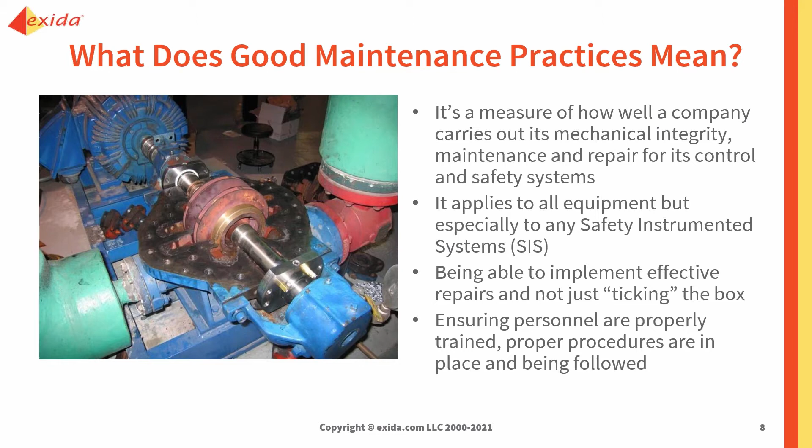And the third P is the paperwork. Do we have the paper trail to show that we're doing what we said we were going to do? Because if we don't, we could end up with problems occurring there. So this is the reason why we need to do this. The next question is, how do you know how good your practices are? And here again, when I talk to companies, a lot of the managers feel that they are following good practices, but they're not necessarily measuring it.

So one of the things that you can use that we have come up with at exida is something called the Site Safety Index model. It's a way of doing a qualitative first pass, if you like, at assessing the capability. It's basically a questionnaire. So you can go to the Site Safety Index website and fill in the questionnaire. If you fill it in honestly, it'll give you a ranking.

The other way to do that is to follow up with an independent third-party site audit, where somebody comes in and does a series of interviews to see how things are being done. Being able to measure the SSI is obviously very important in terms of understanding where the company currently is and what improvements can be made.

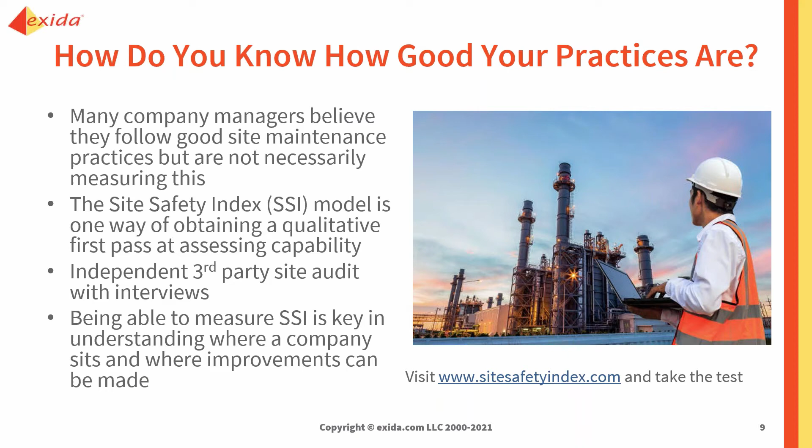So what is this model? It is basically a simple qualitative model using concepts from 61508. So somebody said to me this morning, well, where is it in 61508? Well, it's not. It's what we have determined from the concepts of 61508, and we have built this into our tools so that you can look at how well maintenance is conducted. And you can look at it from the sensor subsystem, the logic solver subsystem, or the final element subsystem.

And as you can see, there are 5 levels, 0 to 4. 4 is perfect. That means everything's done on time according to requirements and nothing is missed. 0 is bare minimum. That repairs are not always done when they need to be done, or they're not fully complete. There's some sort of band-aid that's been done to just get them by. These are things that would cause a degradation into the performance of the SIFs, your safety instrumented functions.

So you may think that you've got a SIL2 SIF, but if you're not maintaining it properly and you're not doing the proof testing according to requirements, so here again, it's important that the safety requirement specification is with the operations and maintenance people. If you don't know what's in that SRS, how are you going to be able to maintain the safety instrumented system and its safety instrumented functions properly?

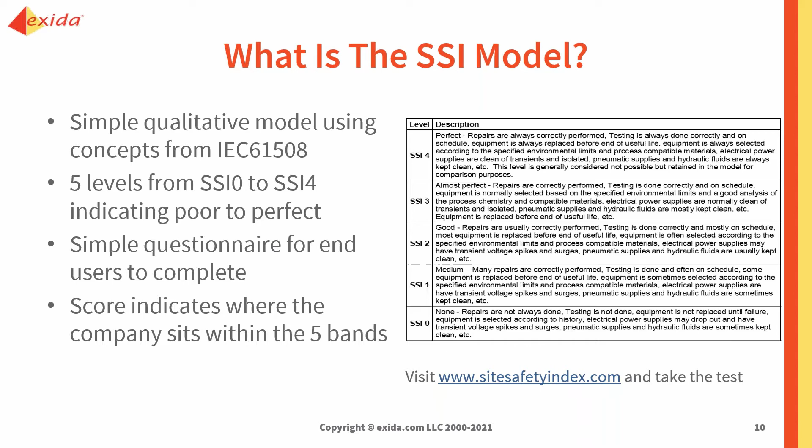So again, with the tool that we have, we usually give the benefit of the doubt and default to an SSI2, which means good. And if you do have exSILentia, you can try it yourself. You can, for example, look at the final elements and change it from good to 0 and see what it does to the risk reduction offered by the SIF. And you'll be very surprised. It has a significant impact.

Well, culture is very endemic in a company, and it usually comes from the top down. So if the company board is only focused on the bottom line and keeping their shareholders happy and minimizing costs, that's not going to help when we're trying to maintain the SIS and its SIFs.

So if you went to your manager and said, look, I need to raise a purchase order to have these devices replaced because they're coming to the end of their useful life, or I need to spend X thousand dollars to have these valves refurbished. And he says, well, have they failed? And of course, the answer is no. The pushback may be, well, then why do we need to do that? So this is another area where we are trying to help educate end users by explaining to management, if they don't understand, why these things are important.

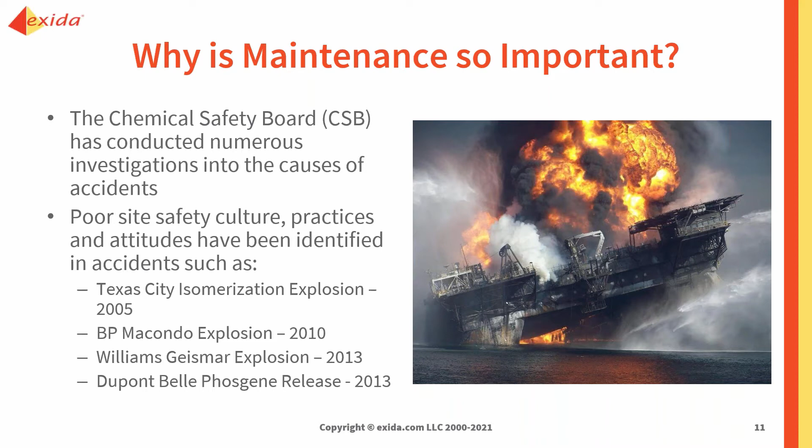And interestingly, and I should have made this point this morning, is that insurance companies are paying attention to all this now. And they're having their assessors come on our webinars. In fact, I've done a series of webinars for a couple of the insurance companies for them to understand the questions they need to ask their clients when it comes to functional safety and cybersecurity, and indeed alarm management. So it's very important to have the right culture.

Some of the factors that can impact the safety instrumented system and the overall performance, of course, is the equipment selection and qualification. So when the design is being done, it's very important to look at the requirements for the equipment. And whatever equipment is chosen, 61511 is very clear about how you justify the choice of the equipment you're using in your safety instrumented function design. The first is to use IEC 61508 certified devices for the relevant SIL level. The second is prior use justification. That is it. Because I like the equipment, because I'm used to the equipment, doesn't qualify.

Prior use justification requires that you have a considerable amount of accurate data, failure data, on the devices you're using in similar operating profiles and environments. Now, it doesn't necessarily have to be in a safety application, because function-wise, they're operating the same way, whether it's safety or non-safety. So if you've been using it in normal non-safety, as long as the data is sufficiently voluminous, so in other words, we have a high number of operating hours of data, so from a statistical point of view, it's valid, and it's applicable to the environment and the conditions, then we can use that data. If not, it's going to be very difficult to justify the prior use application.

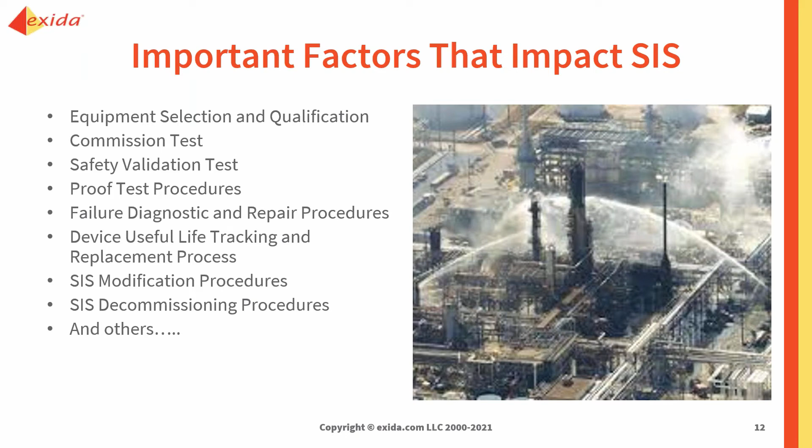SIS decommissioning as well, those procedures, because if we're going to take the SIS offline, how are we going to do that? Are we going to do it with the facility running? In which case, are we going to take a SIF offline at a time? And how are we going to manage that? So all of those things are very important. And of course, there are other things as well that will impact the performance of the SIS and its SIFs.

So what are the consequences of improper maintenance? Well, the obvious one is that we could end up with SIFs failing on demand. This is something we want to avoid like the plague, because hopefully the SIFs never get called into action because our non-SIS layers of protection are doing their job. But if it is called into action, it needs to be reliable and work.

We can also get an increase in unwanted trips. Here again, if we're not maintaining our equipment properly, we could get a lot more failures, premature failures. This will have an impact on maintenance because it's now going to increase the maintenance budget because we have to spend more money and more time fixing things or having to start up again.

And of course, if we've had a trip, depending on what it is, if you've got a refinery and you trip the refinery, that's significant, because when you start up again, that's one of the highest risk activities you can do. Plus, it may take you the whole day to get the whole thing back up and running. So the cost of that can be significant. If it's 60,000 barrels a day, you lose a day's production.

The increase in risk and the likelihood of a major accident will go up every minute of every hour of every day of every week of every month of every year. So if we're not doing proper maintenance, we're going to increase our risk. We're also going to increase the potential for serious injury or fatality as a result.

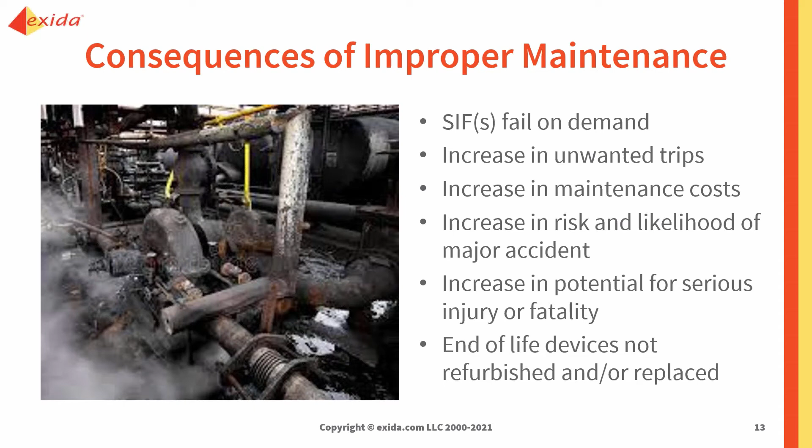Now let's remember that the whole purpose of IEC 61511, the standard, is to provide us with a means to reduce our risk. But more importantly, it's a performance-based standard. It's not prescriptive. So for example, the NFPA 85 is prescriptive. Double block and bleed, you've got no choice. Whereas with a performance-based standard, it'll say this is what you need to do, but how you do it's up to you.

Also, because it's a performance-based standard, we need to have a means of being able to measure how we're doing. So we obviously have to come up with some performance indicators to be able to measure, to know how we're doing. And it's interesting that when we look at the life cycle, there's this one box that says operation and maintenance. And by the way, operation and maintenance is all covered under clause 16 in the standard. And this one box here is where we're going to spend 90% or 95% of our SIS lifetime.

So we can do all the analysis correctly. We can design our SIS and all its SIFs correctly. We can have all the right SILs. Everything's hunky-dory. We're within our target. But if we're not following the operation and maintenance properly, we'll very soon degrade and not have the level of risk reduction and protection that we originally designed. So it's very important for us to track how we're doing.

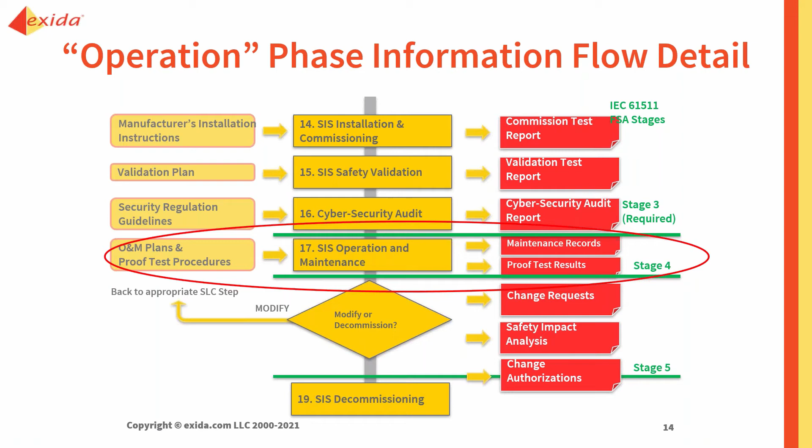And therefore, we need to come up with a set of KPIs, key performance indicators, so we can use it to measure the effectiveness of the SIS and its SIFs in terms of doing its job of risk reduction. One way of doing it is you can use some leading and lagging indicators. And I did another webinar on this as well, which is in the archives if you're interested.

But fundamentally, leading indicators are indicators that will give us an idea as to whether or not we're likely to have a problem in the future, such as we're not doing regular assessments of our O&M people. We're not making sure they're maintaining their level of knowledge and skill. People leave, we bring in new people, we don't train them properly, but we expect them to be able to perform. Unreasonable. So if we're not doing that, that's an indication that we're likely to have a problem later on. Procedures not being followed, that's another one.

Proof testing. If we're not doing the proof testing according to the requirements of the SRS, this can also be a major problem, especially if we get outside of 10%. Because if the proof test intervals have been set at 18 months and we miss them by a couple of weeks, okay, that's not a huge deal, but we would want to see if we could improve that. Conversely, if we miss it by 2 or 3 months, now this is a big deal because it's going to have a big impact on the safety integrity of the SIF and how much risk reduction it's providing. So those are leading indicators, and that will tell us that if we continue doing that, we're going to have a problem.

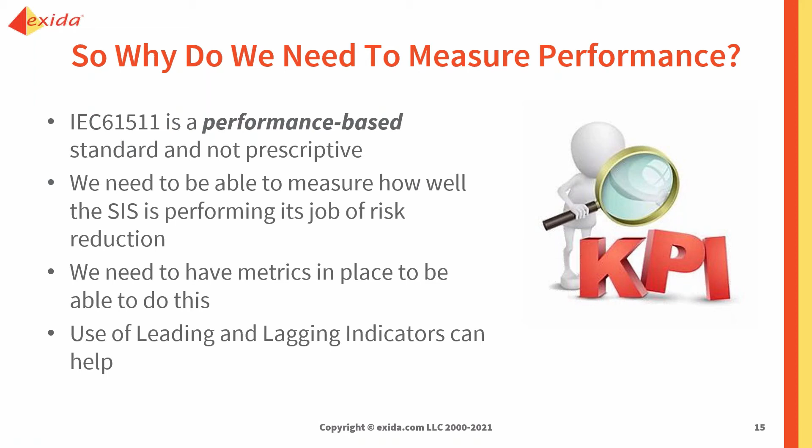I mentioned culture already, but this cannot be overstated. We really need to have the right culture. If the culture's not there, it's going to be very difficult for the people who are responsible for maintaining the safety instrumented system to be able to do it without continually battling with management for funding. Management has to buy in and support this process. So this means we need to develop a learning culture, an open and learning culture. So that means that we have to be willing to do things right and also doing the right things.

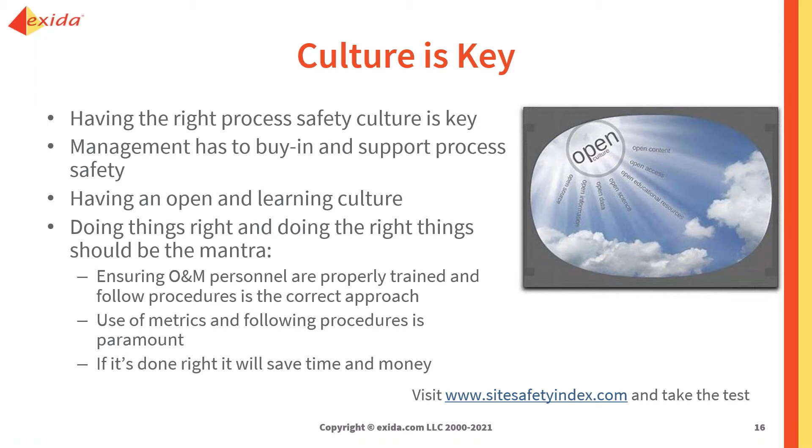We learn from mistakes, we don't punish, we encourage, we want people to take responsibility, we want them to have some ownership. So making sure people are properly trained, making sure that procedures are being followed, conducting audits. And I say to managers, you can do your bit simply by walking around, talking to people, seeing what's going on, and reading any of the audit reports that are being done. Because if you see that there's a trend going in the wrong direction, then that needs to be corrected as soon as possible. And of course, if we do this right, it actually saves us time and money. Because if we're not having to restart because we've had a trip due to a failed piece of equipment or somebody making a mistake, that will save us time and money.

Now, the other thing is 61511 was changed in 2016, as most of you know, and one of the requirements now is to do the FSA4. And it's interesting that some countries, and Australia is one of them, do insist on FSA4s being done. So the regulatory control is much stronger. And also in Europe, in some countries in Europe and elsewhere. But over here in the US, this doesn't seem to be done very much. And it's a shame because the standard says you need to do it.

It doesn't tell you how often you need to do it. That's something that you can define yourself, and you can do it based upon experience. If you're getting incidents and trips and near misses, then that should be an indication that you need to dig in and start looking at what's going on. If the performance is good and we're not having any issues and problems, you could probably do it every 2 or 3 years.

But the way to look at it is every 5 years we have to revalidate the PHA, and do the hazard and risk assessment again. And that's a good period of time to be gathering information. So the information you gather from the FSA4, you can feed into the HAZOP team.

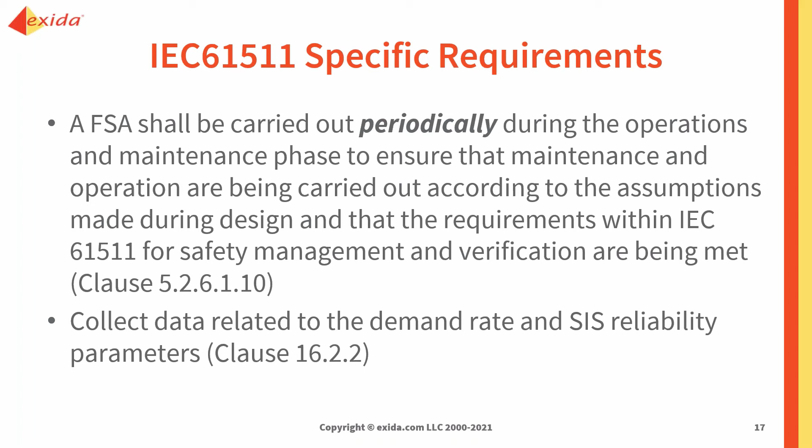So you can look at the assumed demand rates. Were they the same? Are they still the same? Or do we need to reconsider? So what needs to be measured? Well, we define the proof test intervals, as I've said, and those are used in the SIL verification calculation to prove that the SIF design meets the target SIL and the risk reduction.

So how frequently does it need to be done? We need the SRS. We need to follow that. Is it being performed on time? As I said, as long as you're not going over 10%, even then, up to 10% is still going to have an impact. But if it's more than 10%, it's going to get worse very quickly.

Then are the proof tests as effective as originally intended? So here again, are we following the proof test procedures? Because you can design the best proof test in the world, and let's say you can get 95% coverage, but if it's going to take 10 hours to do the proof test, well, guess what? It's not going to get done the way it was intended. So the effectiveness is not going to be there. And again, that has an impact on the performance of the SIF.

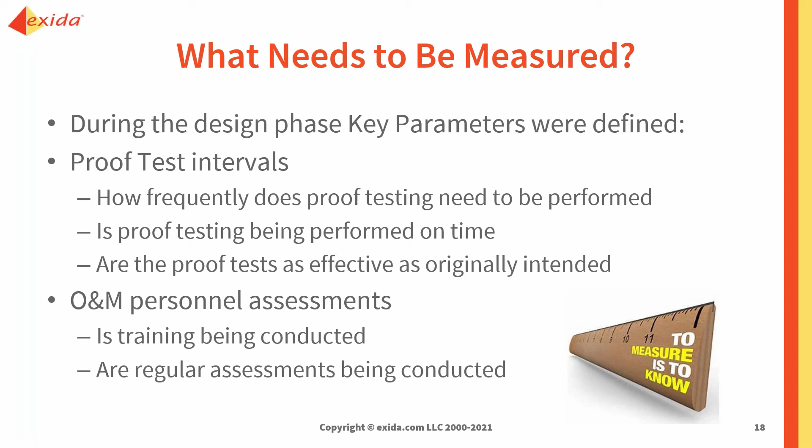The O&M personnel assessments. So are we conducting the training? How often are we doing it? The standard says it needs to be done periodically. Again, it doesn't tell you what that period of time is, but it needs to be defined.

So we've talked about demands on the SIS, whether they're real or false. So we should be counting those, and we should be making sure that they're within the required limits. If not, we need to do some investigation. Incidents and near misses, as I've said already. Failures, both random and systematic.

So if we've got some systematic failures because, let's say, an instrument tech miscalibrated a trip point on a piece of safety equipment such that it would be in a dangerous situation because it would never reach the trip point. So that would be a systematic, because either he's not been trained properly or the procedure may be wrong. That could be a systematic, but it needs to be looked at.

Random failures are failures that typically relate to hardware, but could be people, because people can make random mistakes as well. And that's why it's important to make sure that you understand the type of failure, because when we do the revalidation for the SIFs using field data, it's all based upon random failures. So if we haven't been documenting our failures correctly, we could have optimistically low random failure rates that we're trying to use. Proof testing, as I've mentioned already.

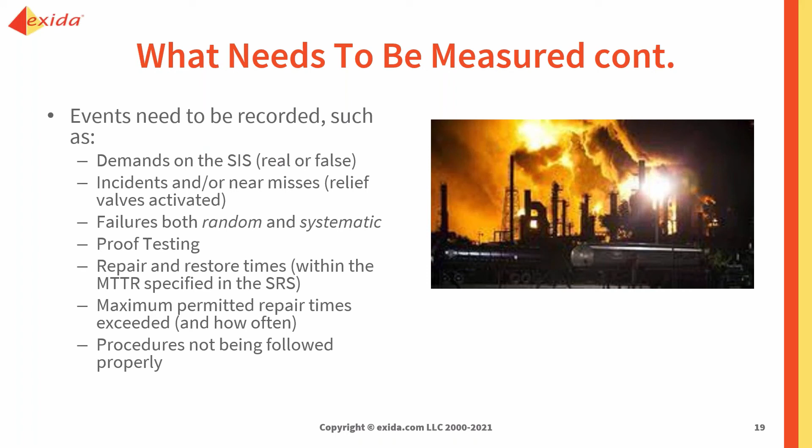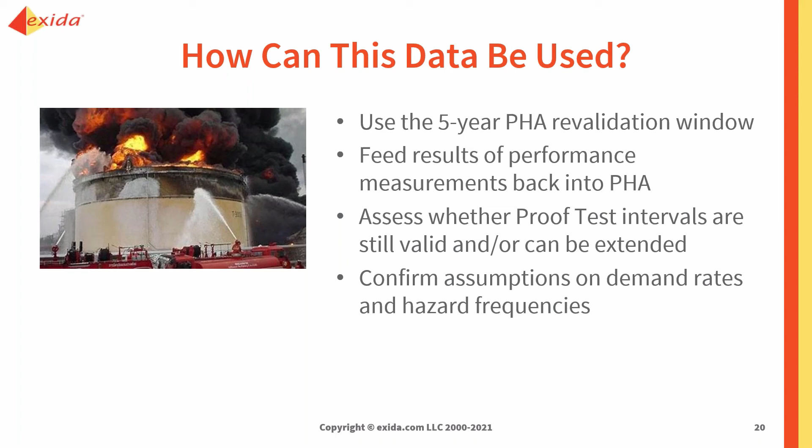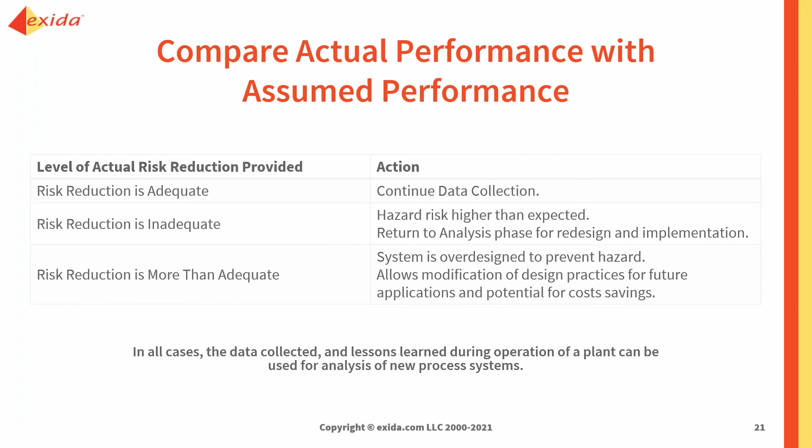If there's an over-design situation, in fact, we've got more than adequate, then we could look at a modification of the design practices. So the idea being that we could change the proof test interval, or maybe we could drop a SIL level if we don't need it. But in all cases, we collect the data, we use the data to learn any lessons from operations, and then we feed it back into future analysis. That's the whole point.

So let's just sum all this up then. The main thing is to make sure that we have an appropriate safety first culture. So we do have trained and competent O&M personnel, and that our site practices are good or better than normal. We don't want to have SSI 0 or SSI 1. We want to be at least 3 or ideally at 4. We want to make sure that we have proper operating and maintenance procedures in place. And again, we should be tracking that to make sure they're being followed.

You can use checklists. I'm a great exponent of checklists. I always use my pilot's analogy. You can have a commercial pilot that may have flown thousands of hours, but every time he gets into the cockpit, he doesn't rely on his memory or his experience. He goes through his pre-flight safety checklist to make sure he hasn't missed anything. And as I mentioned already, you can develop and maintain leading and lagging indicators to help you with that.

You can also undertake regular competency assessments. So how you do that, again, is entirely up to you, whether it's a supervisor monitoring what one of the O&M guys is doing, whether it's maintenance, whether it's operations. You can do it any number of ways, but you just need to do it and you need to document it.